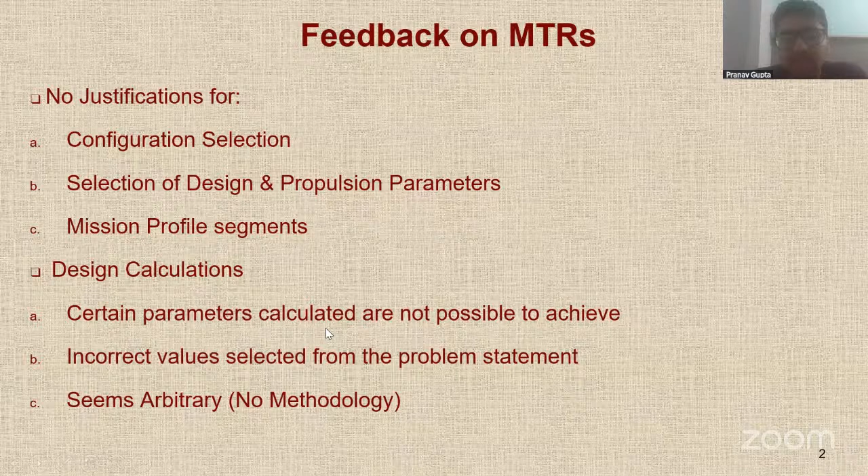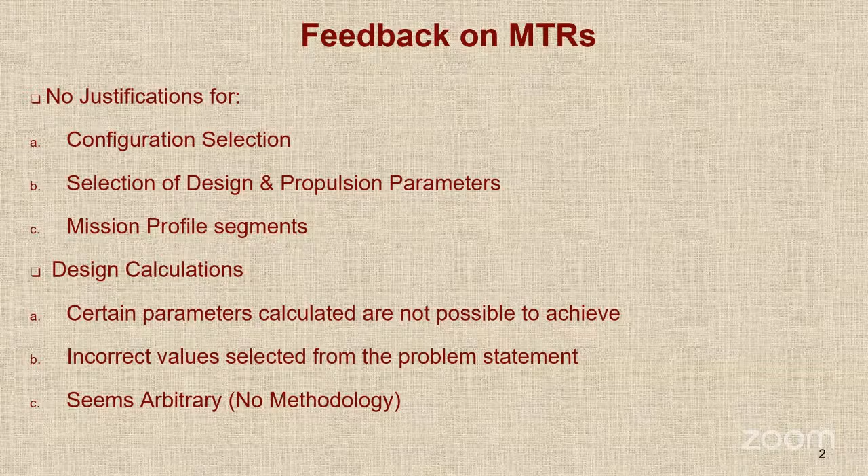Let's go to the next slide. Right, again, it seems that you are not following any methodology, any sequence, right? All your decisions seem arbitrary in nature. So there is no methodology.

This is something I'm going to talk about as well ahead. So understanding of the problem statement also seems to be a bit dicey from your end. You need to really emphasize what are the challenges in the design.

And majority of the teams have not made use of something that is called the vehicle performance score. An objective function has been provided to you and you are required to maximize it to the best of your capability. But we saw that majority of the teams have not done it. So that is something we want to emphasize on.

Many teams are deviating from the problem statement. They are going into unnecessary things. They are going into operational requirements. You are not required to study from which airport is it going to take off or what runway it will require. Not your concern. Your concern is this is the runway length.

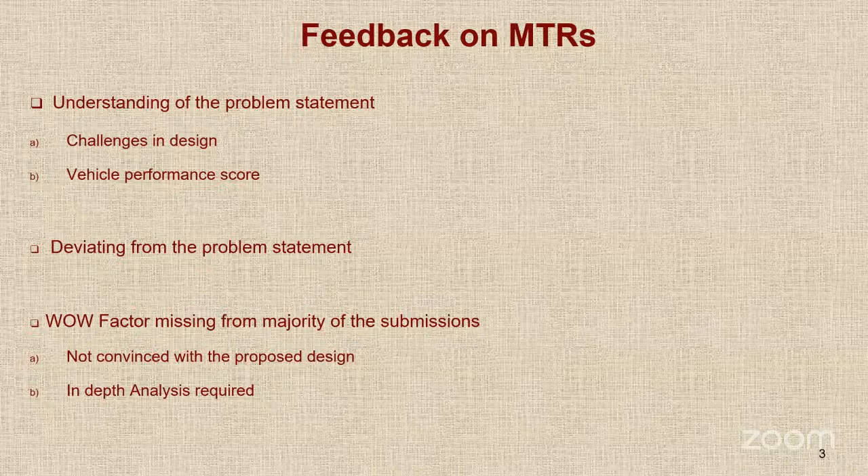Pranav, I'm sorry, I'm not able to hear you. Can somebody else please give a thumbs up if you are able to hear Pranav? No, sir, we can't hear him. Perhaps there is some issue at his end. Is it better now? Yeah, it is better now. Please repeat, you went to the vehicle performance score, after that we could not hear you.

As I was mentioning about the vehicle performance score, Professor, just interrupt me when my voice is not better, I'll join from another device if that is the case. We found that students have to really delve into this vehicle performance score. That parameter has been given to you in the problem statement. You have to maximize it to the best of your ability. From that, you have to go ahead.

Another point is deviating from the problem statement. Many team members are deviating from the problem statement. You are looking at indirect and direct operating expenses. It is important, but not a matter of concern for this competition. You don't have to look at which airport it is going to fly from. You just have to see the takeoff and landing distance. You have to think like a designer right now. I get that it is important, but it is not in the purview of the competition.

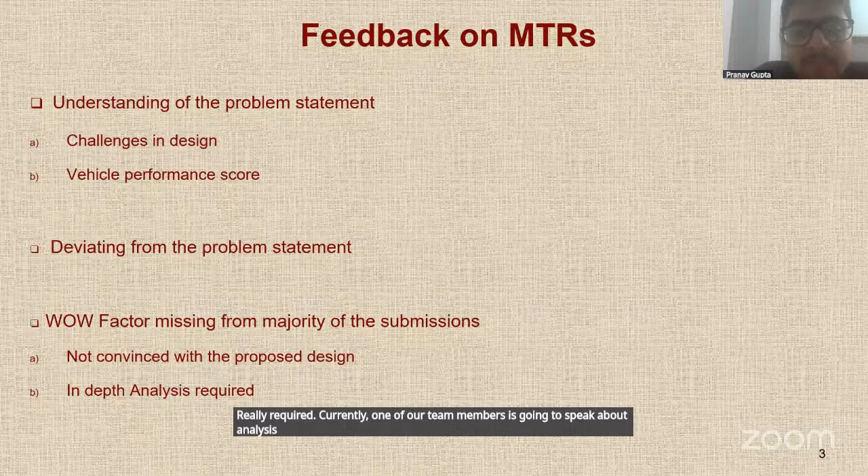And the last point, the wow factor is missing from the majority of submissions. We are not really convinced, we are not really feeling the design that you have submitted. It feels like, okay, you have done some work, it's all right, but when I read a report, it should really stand out and it should look like yes, these students have done a really good job. My final comment is in-depth analysis is required, really required. Currently, one of our team members is going to speak about analysis in this webinar itself. Please go ahead, sir.

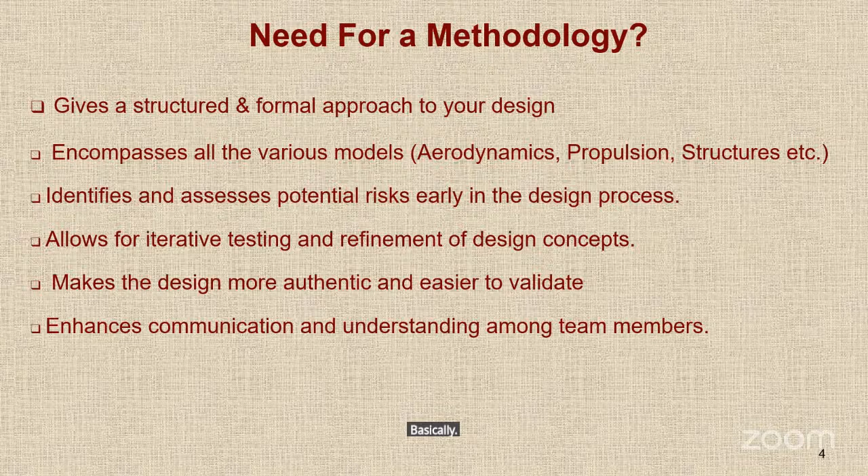Okay, all right, so I would like to take over here. Basically, when we do aircraft conceptual design, let me just put my video on, just a minute. When we do aircraft conceptual design, which is what you are doing, it is very important for you to follow a well-defined methodology or well-defined procedure. This procedure has to be structured and it should be formal, it should not be arbitrary. And this is obtained by a study of textbooks and literature related to aircraft design.

The methodology that you follow should encompass all the models that you are going to require. You may even go beyond aerodynamics, propulsion, structures. You may look into some stability issues, some of you might worry about stealth issues. All those models have to be considered. This is very important because with a methodology that is clear cut and focused to the design problem, you will immediately be able to identify any risk in the design process. If some configuration or some particular candidate is not going to really maximize your vehicle performance score, then those aspects can be ignored right in the beginning. Otherwise you will be wasting a lot of time.

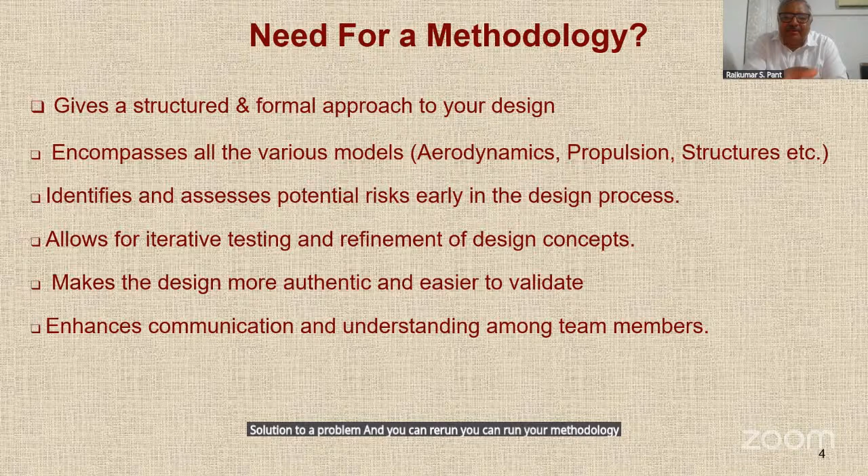A methodology also allows you to do iterative testing and refinement, which will be required as you go ahead. If you have a proper method, then your design can be considered to be more authentic and it will be easier to validate. For example, if you have a solution to a problem, you can run your methodology for that particular requirement and try to get the numbers. Also, if you have a methodology, it becomes easy for team members to have proper communication.

So therefore, we are very particular that if we get design reports which do not follow any formal methodology and which is haphazard, it looks like someone did aerodynamics arbitrarily, someone did structures arbitrarily, and you just put the things together and submitted the report, that design is going to be summarily rejected. So we need a methodology, and it has to be formal.

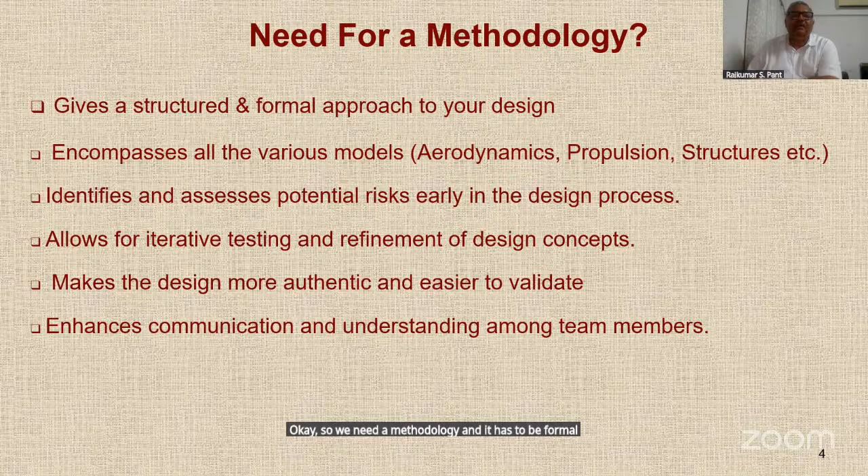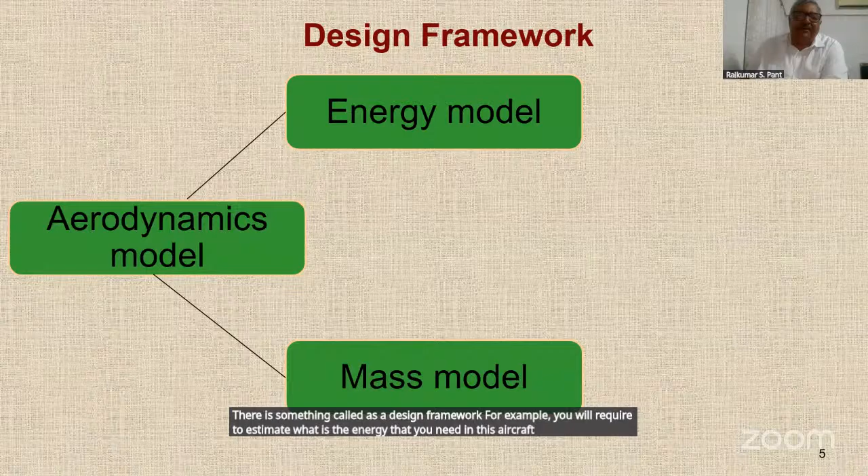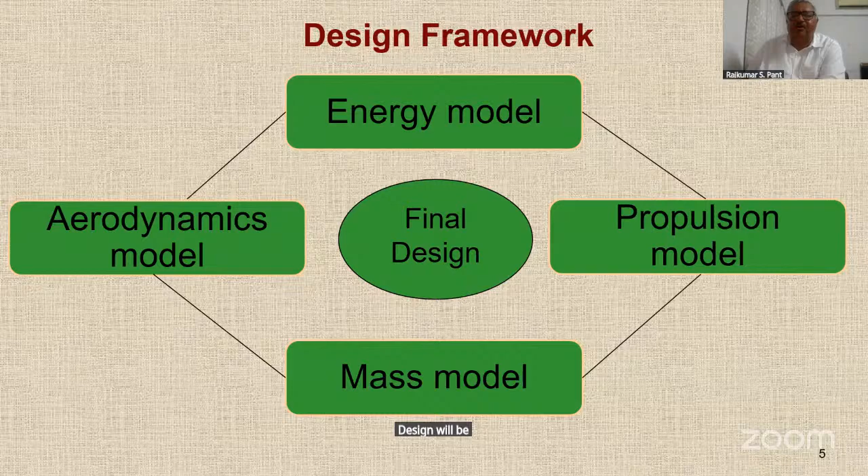So moving ahead, there is something called a design framework. For example, you will require to estimate the energy needed in this aircraft, then combine that with aerodynamics, mass, and propulsion. It's very important, and with all this working together, you get the final design. If you work in isolation, as I said earlier, sometimes while dividing work among team members, you end up cutting the problem into 5 parts and giving each member one part, working independently and bringing it together. That doesn't happen. Design will be successful only if there is constant iteration between team members.

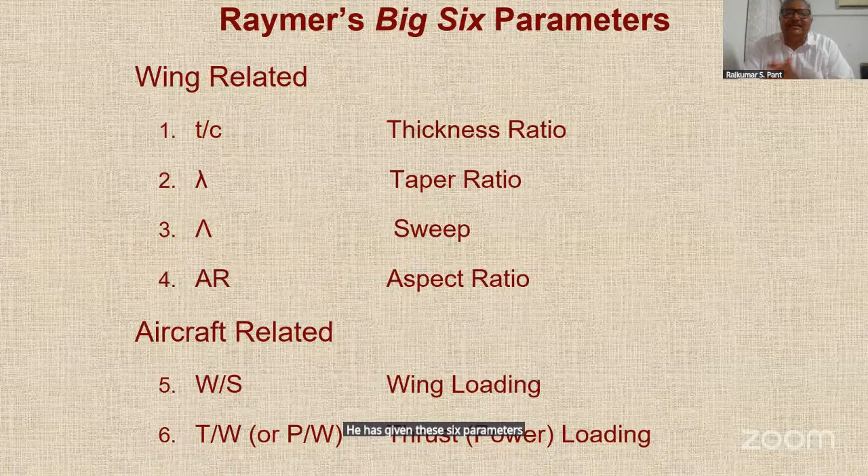Now, when we look at aircraft conceptual design, one of the stalwarts of design is Daniel Raymer. He has given 6 parameters which capture the essence of the aircraft. Of these, because the wing is the main component that produces lift, there are 4 important parameters: thickness to chord ratio (also called thickness ratio), the taper ratio, the sweep, and the aspect ratio. Of these 4 parameters, 3 are dimensionless - thickness, taper, and aspect ratio. Sweep has a number value in radians or degrees.

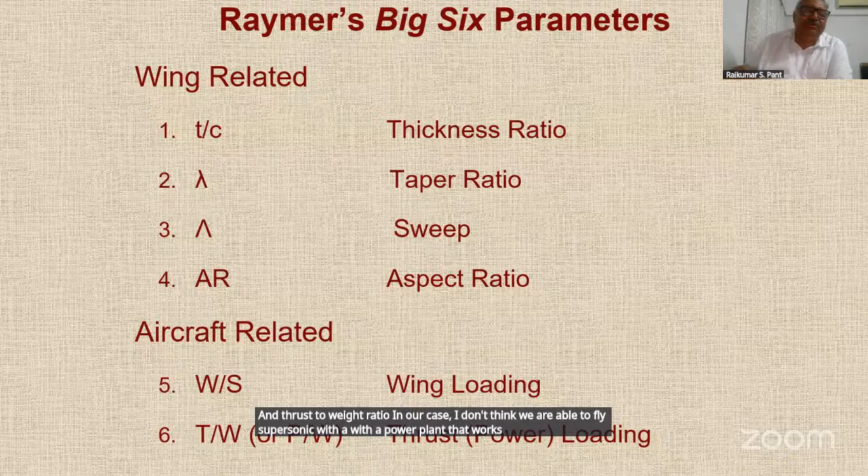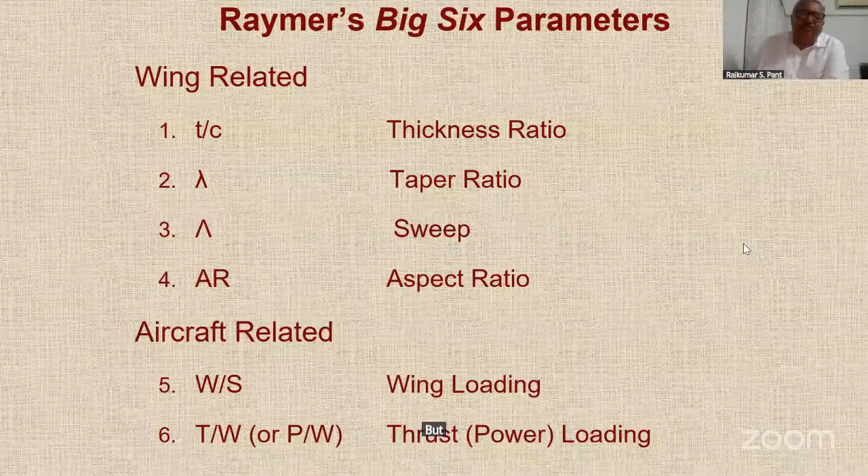Other than that, there are 2 parameters related to the aircraft: wing loading, which is the total gross weight of the aircraft divided by the wing reference area, and thrust to weight ratio. In our case, I don't think we are able to fly supersonic with a power plant that works on power, so it will probably be only thrust to weight ratio. But in some examples, power to weight ratio might be useful. So for you, it will be thrust to weight ratio and wing loading, plus these 4 parameters, plus many more parameters you would like to bring in. But these should be there. Apart from this, you can have more parameters, but these should be there.

Now, why have we talked about these 2 parameters related to the aircraft, W by S and T by W? Because they appear in many performance equations and you have constraints - on takeoff distance, landing distance, the constraint that Mach number has to be supersonic, the constraint that total mission time should be less than 2 hours, and a constraint on range. So when you look at W by S and T by W, this occurs in many of these parameters. Some of them you may not be worried about - for example, we have not given you any sustained turn rate requirement, nor any climb requirement.

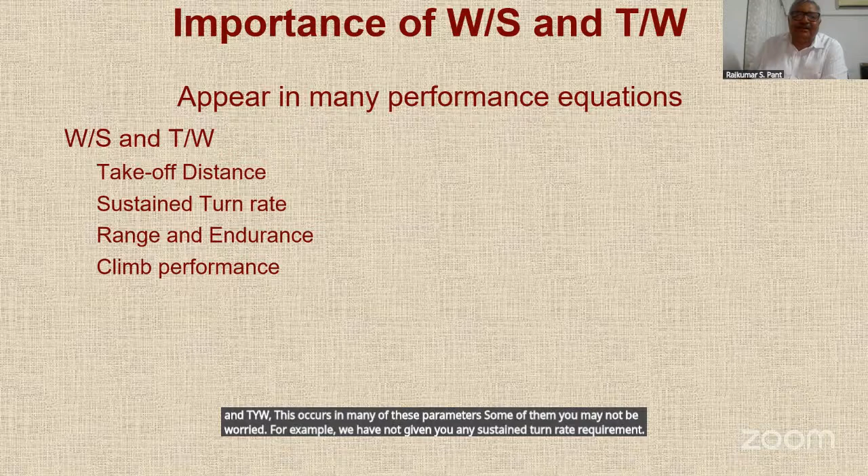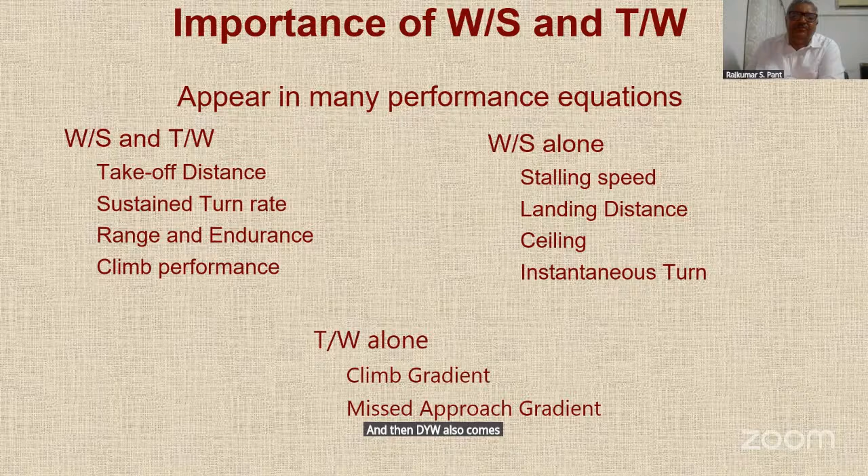It is inherent. Similarly, if you look at only wing loading, it comes into important parameters which are usually required - landing distance is an important parameter for you. So that is why it is important that we look at the correct value of W by S and T by W for the design. And then T by W also comes as an independent parameter in some requirements, which again may not be directly relevant to you in this case.

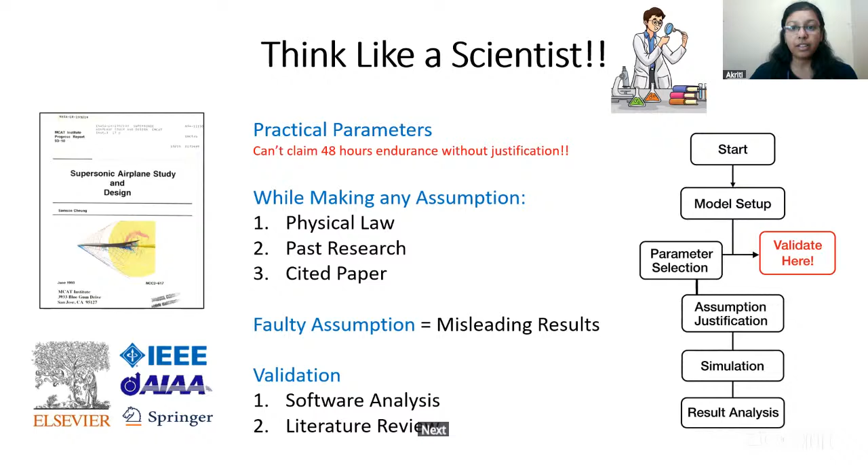Next slide. So this is one of the literature reviews for some supersonic aircraft, which can be used for validation purposes. I'll give you one example.

Say, for example, you got some parameter of range. Now you want to see whether the range you're getting is practical or not. So you'll look into the literature review, all the research papers related to the supersonic aircraft that you got. You look into the values, and if the values are comparable, you can definitely be certain that the range value you're getting is somewhat correct.

But make sure you don't use these values blindly. These are just for validation purposes, to check whether the formulation you're using is going in the right direction or not.

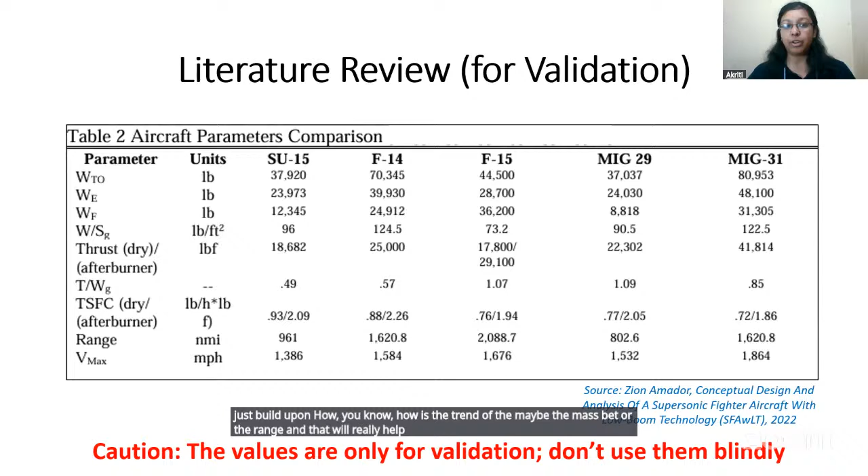One pro tip from my side: you can use a linear regression model, where you take all those aircraft and build upon the trend of the mass weight or the range. That will really help you figure out whether the value you're getting is correct or not. Next slide.

So this was all about the validation part, how you'll justify whatever answers you are getting. Now, the second part you'll be working on in this final term report is the software analysis part. Just to give a glance about why it's important: as an engineer working on this very important and good project, it's really important to look into the parameters you're getting, whether they are correct or not, and to understand how your aircraft is behaving. For that purpose we use software analysis.

So, for making an informed decision about whether the value you're getting is correct or not, as mentioned by Pranav, this is an iterative process.

If you find something that during the software analysis you're not getting the desired values, then you can definitely go back to your drawing table and look into what tweakings or assumptions are to be mitigated. It really helps in trade study, validating whether the aircraft you have designed is feasible or not.

Getting some impractical values will lead to disqualification from the competition and might not look good as well. It will really help you predict the performance. One beneficial part of software analysis is that it considers non-linear stuff, unlike manual calculations which use a lot of linear equations and assumptions. Going into software makes it easier to understand whether your system is working correctly in a non-linear environment.

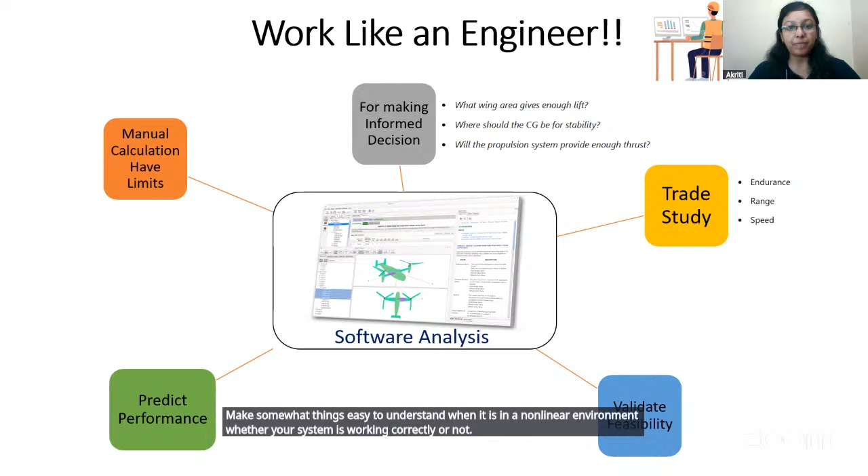Next slide. So I'll give you a brief on what software analysis is vital for any aircraft that you're designing.

The first one is the aerodynamic analysis. As you know, we have various aerodynamic parameters such as lift, drag, CL, CD, wave drag, as you might have done, and some stability derivatives which you can calculate. So for whatever CL, CD you have calculated, to understand whether it is working well for your particular aircraft, it's really important to do the aerodynamic analysis.

As you can see in the picture, you can observe by the rotation of the propeller how the vortices are being formed and how it is affecting the other aircraft components. The tools you can use are ANSYS Fluent, XFoil, and OpenFOAM.

As a bonus point, we get to know with some total drag breakdown, maybe you'll be able to get, with the help of the analysis, the trend of CL versus angle of attack, to see whether the airfoil you've used is properly working or not. So all this is covered in the aerodynamic analysis.

The next is the structural analysis. Say for example, you create a wing and you do not know how much deflection the wing will have while it is in the cruise condition.

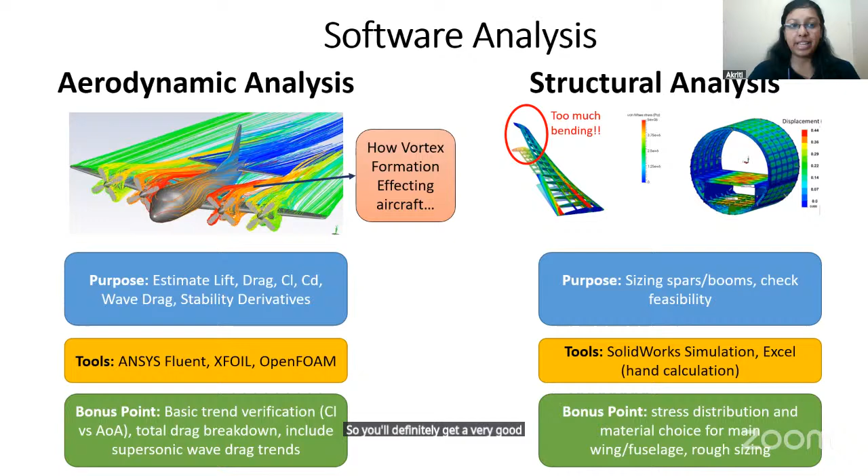Coming back to the structural analysis part, as I said, it'll help you with the stress distribution and whatever material you're choosing, whether it's able to sustain on the aircraft or not. So you'll definitely get a very good feel into whether you're going in the right direction or not. Next slide.

Okay, coming to the stability analysis part. Now why is stability important? You created an aircraft, and now you want to understand that if you leave your aircraft, the pilot has some controls with it. So when it is in the cruise condition, will it be able to stabilize or not? There might be cases where the CG is somewhere front, and your aircraft might topple.

So in order to understand beforehand whether your aircraft will be able to be in an equilibrium condition or not, you use the stability analysis to understand how pitch and roll are behaving, and for designing the control surfaces.

For that purpose, stability analysis is very handy. The tools you can use are MATLAB, Simulink, and XFLR5. But XFLR5 has one limitation: it works for only low Reynolds number. So since you are working on a supersonic aircraft, my suggestion will be to not use XFLR5 for the supersonic aircraft case.

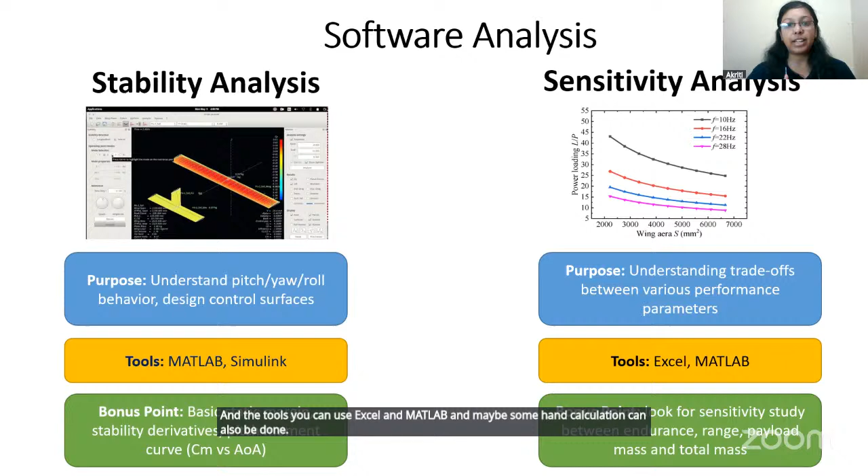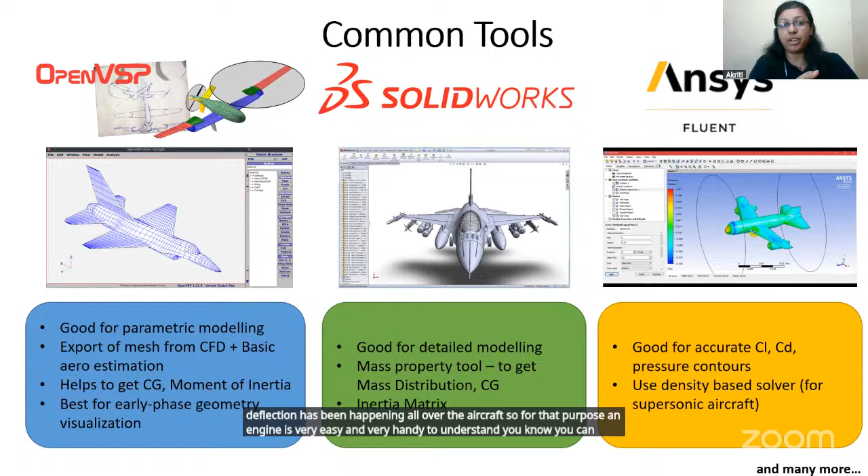Then we have ANSYS Fluent, which is majorly used for CFD analysis. You get some good, accurate CL, CD, and pressure contours. You can look into how the stress distribution is happening, and how the deflection is happening all over the aircraft. For that purpose, ANSYS is very easy and handy to understand—you can just create your own aircraft based on geometric parameters, and finally get all those parameters.

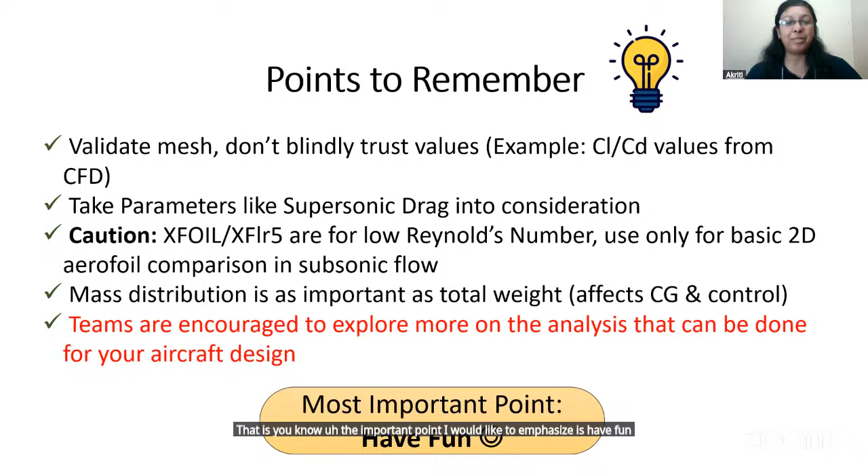Most importantly, from my experience, I'll definitely say you're working on a really good project. This will really help you in your long-term career. Have fun, try tweaking values, put some values in the software, check whether it's coming right or not - some hit and trial stuff. You'll really have a lot of fun while coming to a technical conclusion. So that's the important point I'd like to emphasize - have fun while working on this project, because you're really working on a very good project.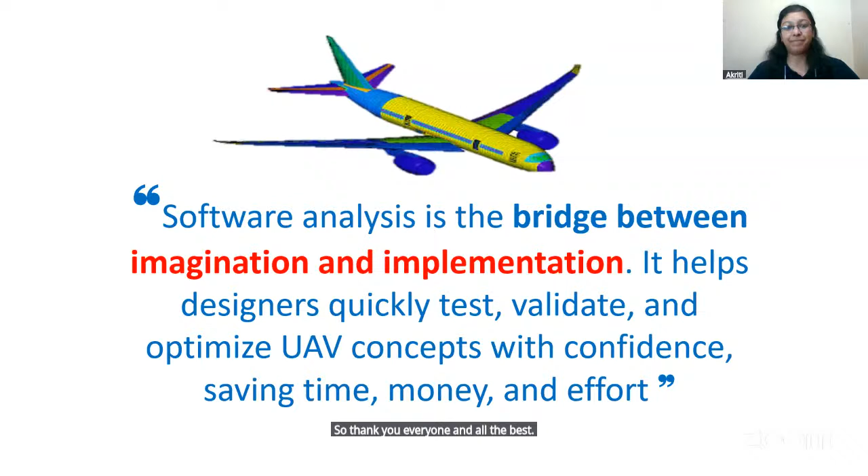Okay, thank you so much, Akriti. That was really, really insightful. I hope our participants got some idea on the way forward for analysis.

Before we open the floor for questions and answers, I'd like to quickly mention the upcoming deadlines. I don't have it on the presentation, but your final design report submission is coming up on 25th of June. After that, all shortlisted teams will be called for a team Viva, because it's very important that we get to know what you understand and what you've written - is there any coherence between that. So that will be conducted, and based on the Viva, some modifications or comments will be given to team members. We'll be expecting all shortlisted teams to submit a modified report, and based on that, we'll shortlist 5 teams to come for the final round of the competition.